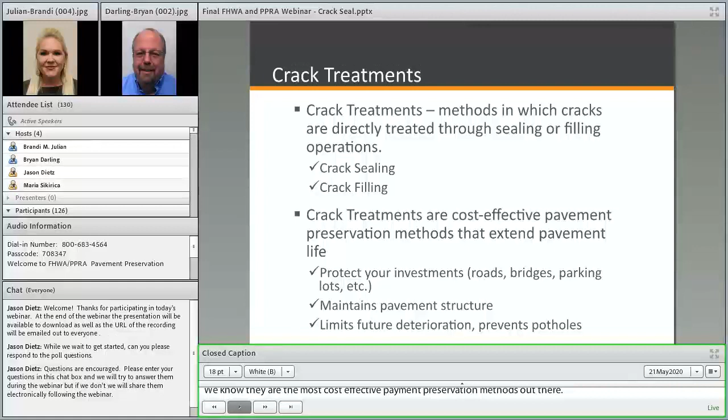First, I want to spend time talking about the differences in crack sealing and crack filling. These terms are often used interchangeably in our industry, and I really want to talk about what the differences are. But ultimately, what is a crack treatment? We know that they are the most cost-effective pavement preservation methods out there. Basically, dollar for dollar, you get the biggest bang for your buck for the money invested as it relates to the sealant service life and the pavement life extension that come out of these treatments. And it's always just about protecting our investments and maintaining our infrastructure.

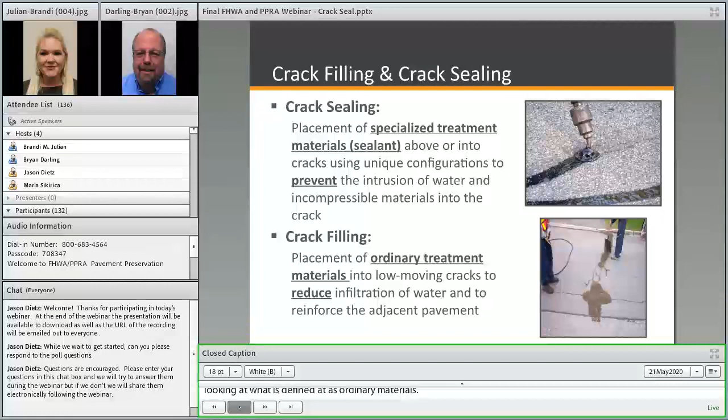So looking at the definition, what's the difference? The FHWA defines crack sealing as specialized treatment materials that are completely preventing the intrusion of water or debris down into the base and subbase of the pavement. So that's ultimately what we're trying to achieve, to really protect the base and subbase. For crack filling, we're looking at what are defined as ordinary materials, so more of your emulsion, sand and oil type materials. And crack filling is really used on areas where we're just looking to fill the void and reduce the amount of infiltration down into the base and the subbase of the pavement. So there is a difference in those two terms, though we know they're used interchangeably within our industry.

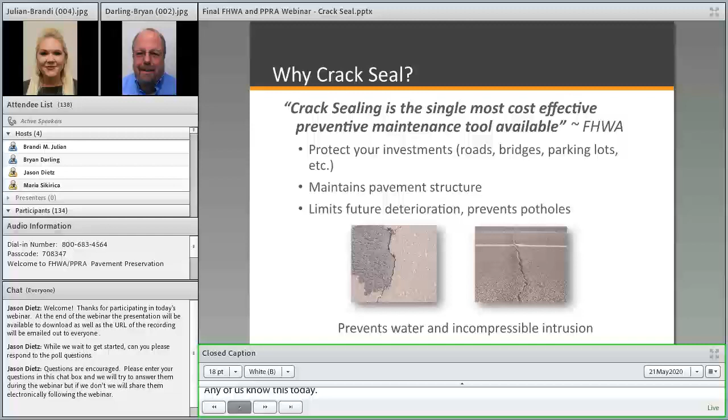Again, right here from the FHWA, a quote: crack sealing is the single most cost-effective preventative maintenance tool available. I think many of us already know this today. Again, protecting our investments, maintaining our infrastructures, and really limiting future deterioration. It's a big pothole prevention method as well. So some of the other side-by-side comparisons: when we look at crack sealing, we're looking at complete prevention, waterproofing, if you will, in comparison to crack filling, where it's more of just filling the void.

Crack sealing, again, specialized materials, and they are highly elastic and flexible. We're going to look at that more in the testing section when we're talking about specifications and how important that is when you're crack sealing and understanding the anticipated seasonal and thermal movement that you might be having in your pavement. Crack fillers are more rigid or semi-rigid materials, so they're not going to be able to accommodate seasonal and thermal changes in your pavement or crack movement. Crack sealing, again, requires a little bit more crack preparation. Routing might be involved. Placement configurations vary greatly with crack sealing. Crack filling is more of cold applied materials or emulsions, dusting with sand.

One of the biggest things I want to call out on this slide is the service life. When we're talking crack sealing, and we'll get into this a little bit more, the average lifespan of just a blow-and-go treatment is about 5 years. On a new pavement, if you're routing and sealing, we've seen up to 10 years of sealant service life in independent studies. So we're seeing great performance out in the field.

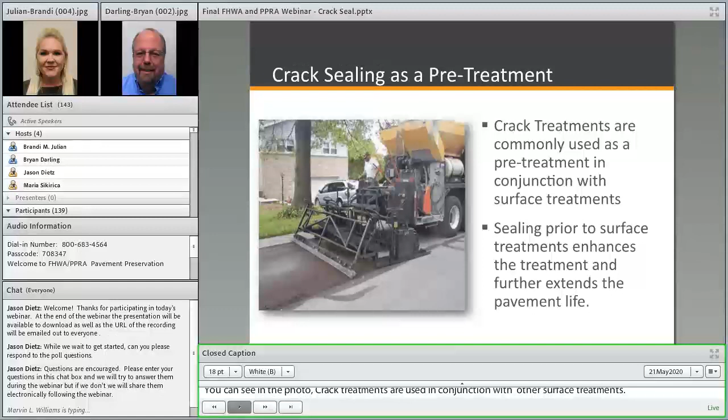So let's go ahead and move in and talk about some of the great data we're seeing come out of NCAT. So again, crack treatments, as you can see in the photo here, are used in conjunction with other surface treatments. We know that if you go in and seal up the cracks prior to your surface treatment, it's going to help extend the service life and the performance of that other surface treatment.

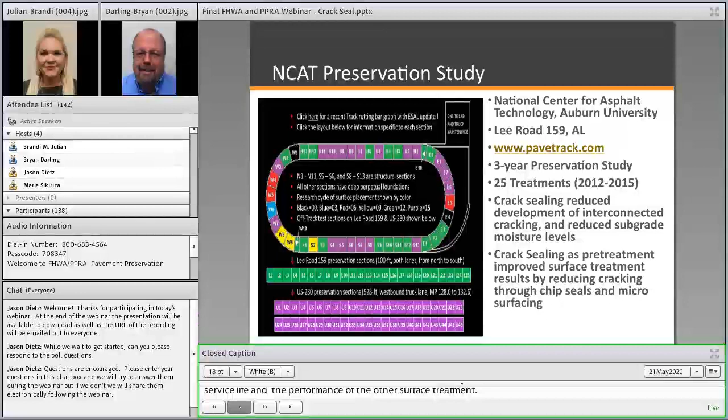So crack sealing is not only effective as a standalone treatment, it really is effective working in conjunction with other pavement preservation methods that you might be doing on a daily basis. So NCAT, that's the National Center for Asphalt Technology. They're based out of Auburn, Alabama. They have a whole bunch of test tracks and roadways down there that they're doing a lot of great independent studies on. They're testing a whole bunch of different pavement mix designs, preservation treatments.

So what we're going to focus on is this green line, if you see here. It's Lee Road 159, and that's what we're going to talk about in this study. But I just wanted to share, this is a print screen directly from their website. It's pavetrack.com. I encourage you to go there and check out their website. All of this data is available on their website. Lots of good research that they provide there to the industry, to the public.

But looking at Lee Road 159, this is a county road that goes up to a stone quarry. So it's a 5.5-inch thick paved asphalt road. What they did was they took 2 sections at the beginning of that surface, and they made 2 control sections. They did nothing to it, applied no treatment. And then moving down along that roadway, they broke it out into 23 different sections, and they applied different pavement preservation applications and materials onto each section.

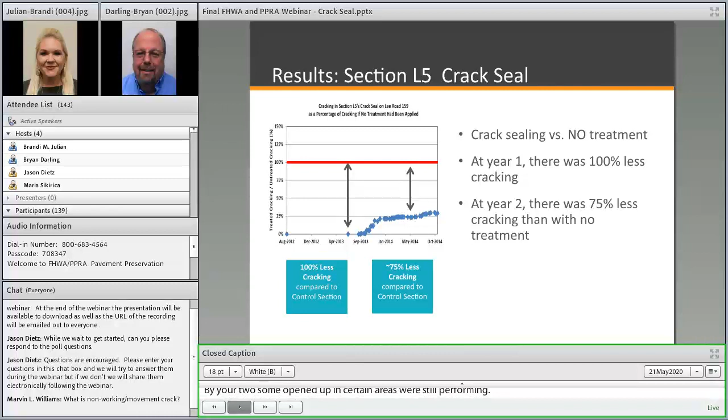So in the next section, L6, they did a single chip seal. So in this treatment section, they did not crack seal first. They just came out, cleaned, and put down a single layer chip seal. Now, it performed awesome through the first year. You can see all the data points here on the bottom line. It was performing at 100% after that first year and that first season.

But in year 2, when we got into that second winter of 2014, you can see that all of the chip seals started cracking open, and in fact had more cracking in comparison to the control section. So basically what this data was telling us is that after about 2 years it loses any value in comparison to having done nothing.

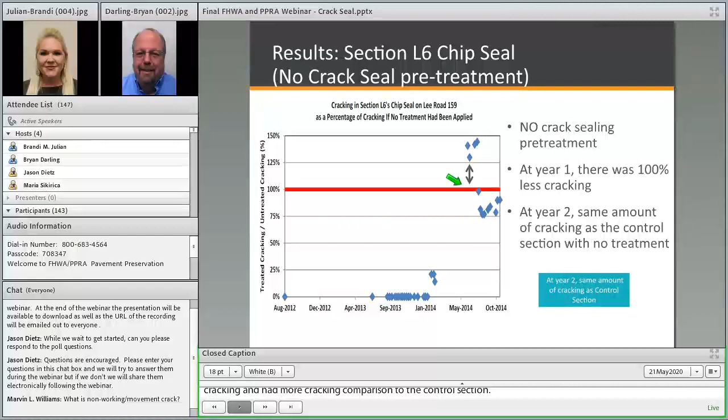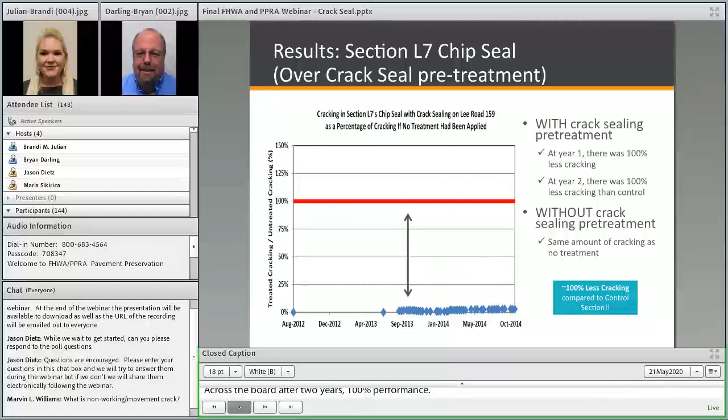So what we looked at next was the next section where they did a crack sealing pre-treatment first of all the cracking, and then put a single layer chip seal down. And you can see here the outstanding performance. So across the board after 2 years, 100% performance. So huge swing there. Without crack sealing, it basically lost all benefit after 2 years. And just by crack sealing first and then putting that chip seal down, it was still performing at 100% after 2 years. So great data there, showing that crack sealing helps the effectiveness of other surface treatments.

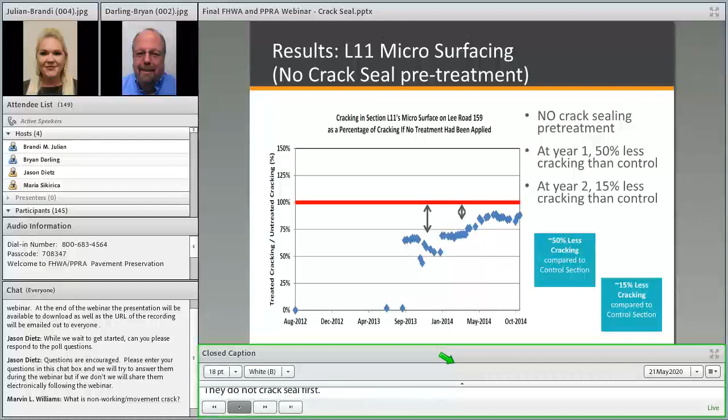This section was a micro surface. They didn't crack seal first, just put down a micro. After 1 year, there was about 50% less cracking in comparison to the control section. After 2 years, only about 15% less cracking. And then in section L12, they crack sealed first as a pre-treatment and then applied the micro. And we saw better performance of the microsurfacing. After year 1, 90% less cracking, and at year 2, 60% less cracking. So again, crack sealing as a pre-treatment really helps extend the performance of all of your other surface treatments.

The impact of crack sealing was published by NCAT. They said as a standalone treatment, crack sealing reduced cracking by 75% in comparison to doing nothing. It reduced cracking 100% with a chip seal in comparison to not crack sealing first. And with micros, it reduced cracking by 45% for microsurfacing treatments. So really good data coming out of there.

All right, now that we've talked about crack sealing as a pre-treatment to surface treatment, let's move into our next section and talk about cracks, their formation and the different types. So Jason, I'll ask you to launch our next polling question here. Rate your familiarity with the different types of cracks and how they are formed. Would you say you're an expert, really familiar, intermediate, pretty familiar, or a beginner just learning?

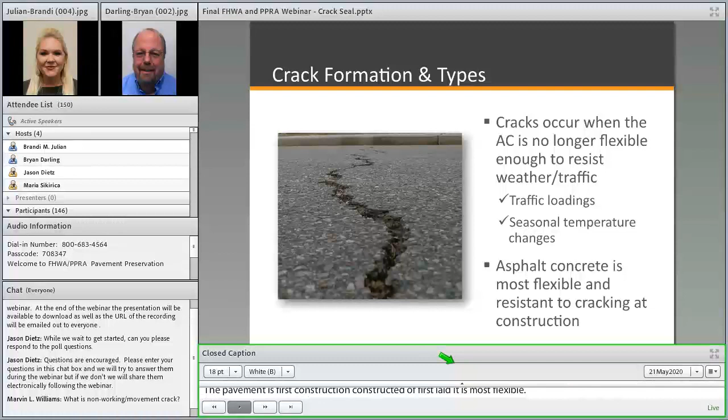So let's move on and take a look at crack formation and its different types. One thing that we know is that all asphalt is going to crack. When that pavement is first constructed and first laid, it is its most flexible. And we know that over time, oxidation from the sun, the seasonal temperature changes, traffic loading, all of those stresses that pavement has to withstand, it's going to eventually crack. So we know that it's inevitable. It's going to happen.

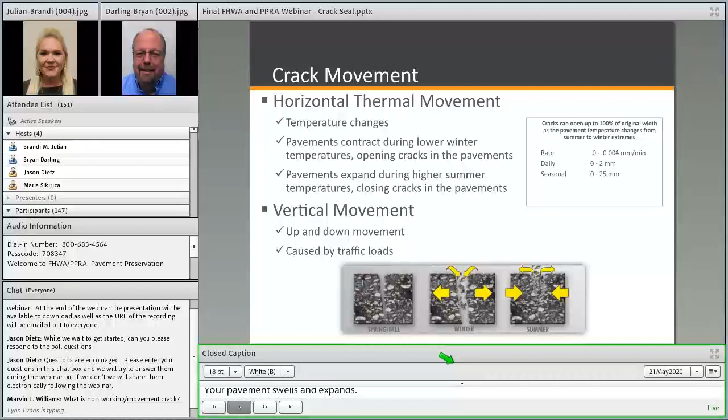And again, it's getting horizontal movement by thermal movement, right? It's cold in the winter in most places. Your pavements shrink and contract, and then it gets hot in the summertime. Temperatures rise, your pavements swell, and they expand. So that constant thermal movement is always part of why cracks form in your pavement. And then your traffic loading is a big part of that vertical movement that pavements have to withstand, but also is part of the cause of crack formation in your asphalt.

So what we do is we define high-moving cracks and low-moving cracks. And the indicator of that is 1/8 of an inch or 3 millimeters. So it doesn't sound like a whole lot, but what we are always trying to understand is: is this crack moving? Is it working? Is it opening and closing a lot throughout the season?

And the reason why we're trying to understand if a crack is moving or not is because that is important in your sealant selection. If you have a crack that is going to be experiencing thermal movement and opening and closing with those seasonal highs and lows, you have to select the sealant that has the flexibility, the high temperature stability, and the low temperature properties to be able to accommodate all of that movement season to season and resist cracking in the winter and resist tracking in the summer. So that's why we're always trying to understand, is this crack moving or not?

And the main takeaway here, again, is that indicator is 1/8 of an inch. If we think a crack's moving more than 1/8 of an inch, we deem that as a high-moving crack. And on the opposite side, if it's moving less than 1/8 of an inch, we deem that a low-moving crack. So a question I get a lot is, how do I know? Am I going out there with a ruler and measuring it all year? No, we know that's not realistic. People aren't doing that. But a great way to understand that is by the type of crack. You can kind of take an educated guess by looking at the type of crack.

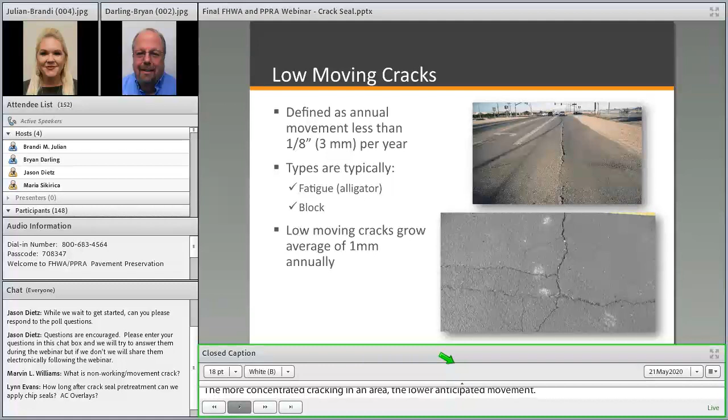Cracks that are going to be low-moving are typically going to be fatigued areas. The more concentrated cracking in an area, the lower anticipated movement. The further spacing between cracks, the more anticipated movement. So low-moving cracks are going to be block type cracks or fatigued and alligator areas.

Cracks also grow. This is something else we know. I get asked a lot, when should I start crack sealing? How wide does a crack have to be before I should start a crack sealing program? And the answer there is as soon as you have a crack, you have a problem. You're letting water down into the base and the subbase of your pavement. So kind of standard is about 1/8 of an inch. If you have cracks that are open, those are pretty small, hairline to 1/8 of an inch, you should begin crack sealing.

Because what we know is going to happen is they're going to continue to deteriorate. That traffic loading, those wheels, that abrasion driving over the face of that crack is going to wear it away and open those cracks up, along with any seasonal temperature changes, that thermal movement. It's going to continue to degrade and ravel away and open that crack up. So we do encourage you to crack seal earlier than later. It's, again, about preserving our pavements, keeping our good pavements in good condition.

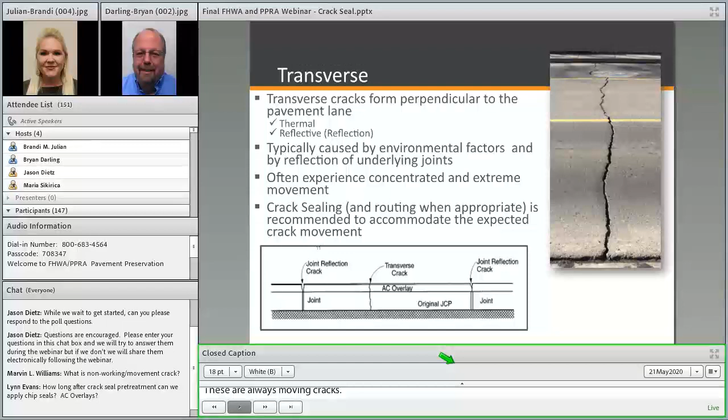Longitudinal cracking, so these are the cracks that run parallel with your driving lanes. They often are formed in one of two ways. One is a construction joint when they're laying that HMA mat, right? They lay that one section of paving lane. It cools down, and when they come back to lay down that second paving lane right up against it, adjacent to it, you get a cold joint there, and that's always the weakest spot in that pavement. And that's why you see those longitudinal cracks that run for miles and miles along the roadway.

So we talked about cold joints. The other way that longitudinal cracking forms is often just by traffic volume, traffic loading. They often occur in the wheel path in the road. And with the longitudinal cracks you find in a wheel path, we definitely also highly recommend crack sealing those as well, because this is the area that often gets rutted right there in the wheel path. Water flows down into it, and this becomes susceptible to becoming that rutted alligator area we so often see in our asphalt roadways.

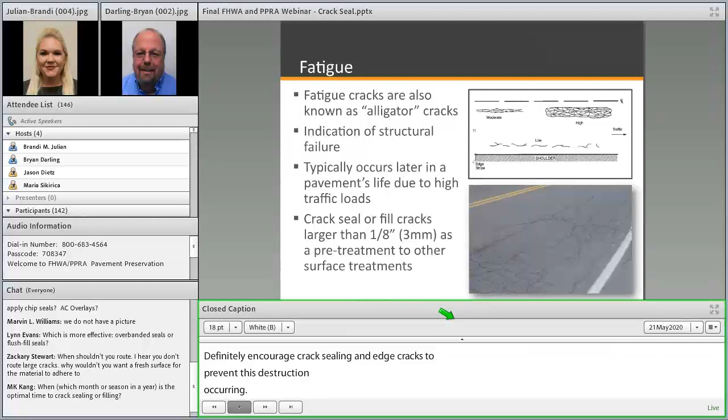Fatigue cracks, so we talked about this a little bit earlier. This is in older pavements where they have not really been preserved and have been let go, and they get to a point where you have a lot of interlocked cracking like this. When asked if I would crack seal something like this, this is not something in this photo that would really be a candidate for crack sealing. Again, unless you would be coming in crack sealing knowing that you're doing it as a pre-treatment to a different surface treatment.

I talked about crack density and the amount of crack spacing in an area, and we tend to use that as a rule of thumb. So when you're trying to calculate crack density, what you're really looking at is over a very specific area of pavement. You're looking at the linear footage of cracks that are present per square foot within a specific pavement area. And what we always mention with routing specifically, if you're going to come in and route a reservoir and you're doing a route and seal application, we use a rule of thumb of 20%.

If you have crack density greater than 20%, we are not going to recommend routing. We're going to say there's probably a little bit too extensive cracking to run a router through that asphalt. You might do more damage than good. So in this case, we would just recommend a blow and go: going in, sealing, putting an overband down. In pavements where you have less than 20% crack density, we would, again, as a rule of thumb, highly recommend that as a candidate for a route and seal type application. And again, other variables always come into play, but that crack density, that 20%, is just a good general guideline or rule of thumb.

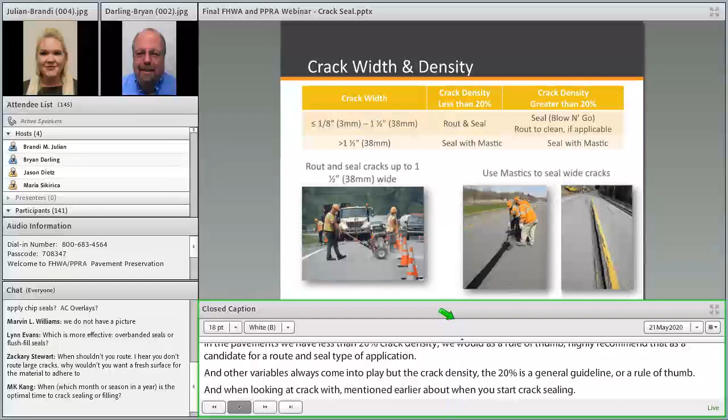And when looking at crack width, I mentioned earlier, when do you start crack sealing? Well, as soon as you have cracks open up, time to start thinking about it. So anything hairline to about 1/8 of an inch up to 1.5 inches wide is a candidate for crack sealing. If the crack density is less than 20%, now we're going to say route and seal that. So again, cracks 1/8 of an inch to 1.5 inches with less than 20% crack density, we're going to say route and seal.

If it's a 1/8 of an inch to 1.5 inches wide crack, but has greater than 20% crack density in that pavement, we're not going to recommend routing. We're saying that's appropriate to just do a blow and go application. Anything over 1.5 inches wide is too large of a distress for crack sealant alone to accommodate.

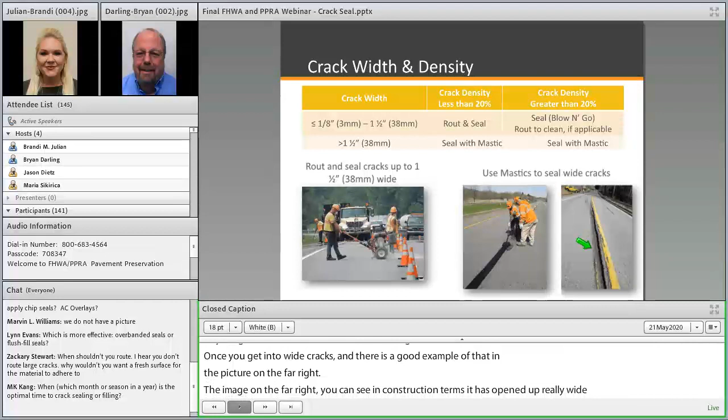So once you get into wide cracks, and there's a good example of that in the picture on the far right here. I can't get my arrow to work, I apologize. But in the image on the far right, you can see an old construction joint that is opened up really wide, and it's a great candidate for mastic. So anything over 1.5 inches wide, that's when we definitely recommend moving from a crack sealant to a sealing mastic. And mastics have aggregates in the binder, so there's additional structure and support in that material to be able to seal up wider distresses, as you can see in that middle image there.

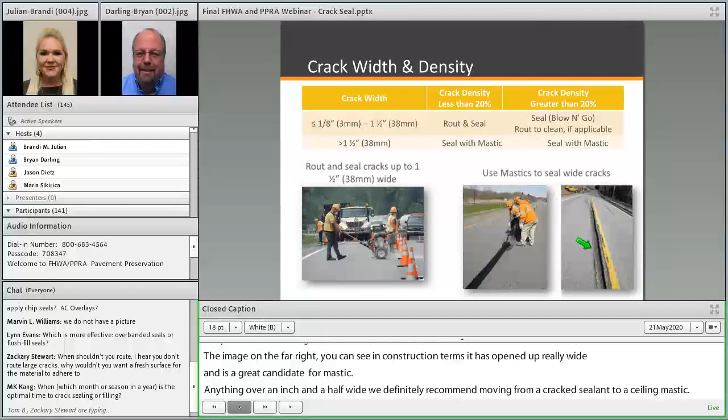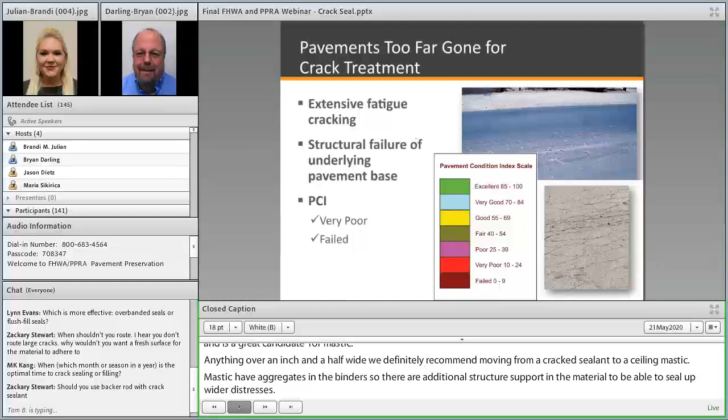All right, and pavements that have gone too far. So crack sealing obviously is not appropriate everywhere. Anywhere you have extensive fatigue cracking, if you have structural failure, if you have base failure or underlying pavement base issues, other types of more extensive rehabilitation or reconstruction are going to be necessary. Crack sealing would not be appropriate in those conditions.

All right, so we're now moving into our fourth section where we're going to talk about installation best practices. Jason, if you can go ahead and launch our next polling question. So for all of our attendees here, how familiar are you with crack sealing operations, actually going out and doing the work? Are you somebody that's really familiar with crack sealing, intermediate, pretty familiar, or are you a beginner or not very familiar with the actual application process? We'll give a couple more seconds here. Lots of answers are still flowing through.

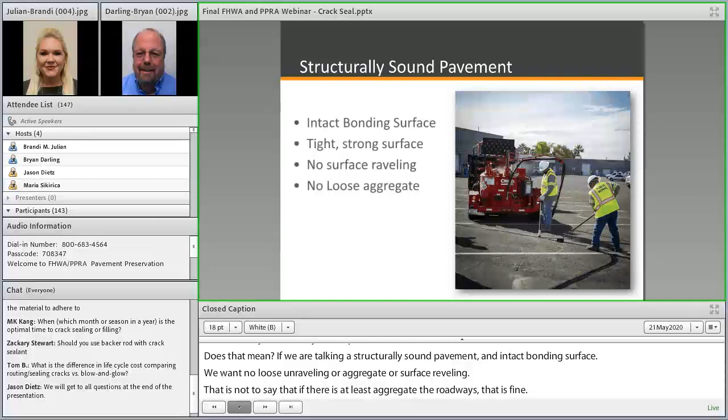So what does that mean? If we're talking a structurally sound pavement, an intact bonding surface, we want no loose raveling or loose aggregate or surface raveling. That's not to say that if there's just loose aggregate on the roadway, that's fine. That can be blown off with an air compressor. But all of the types of cracks that were shown in the previous section are great candidates for crack sealing. So again, good bonding surface, no raveling, and no loose aggregate inside of that crack face.

Dry, it has to be dry. If there is moisture present inside or down inside of a crack, it is going to negatively impact the adhesion and the bond of the sealant to the asphalt surface. So it's imperative that it be dried out. If it rains or it's been damp, close to the dew point, wait a few days.

Even if it had been a few days since the last rain event, but it might be close to the dew point or still damp outside, we're going to highly recommend that you use a hot air lance to really get down inside of that crack. Even though you might not be able to see moisture with your naked eye, it can and probably likely is still present down in that crack. So it's just a good rule of thumb to use a hot air lance there. Get out any moisture or dampness that might be down in that crack to help improve the adhesion of your sealant. Because ultimately, we want it to stick, right, and do its job and seal that crack.

Weather considerations. Ideally, we are looking for moderate to warm temperatures. Now, that's why spring and fall tend to be ideal crack sealing seasons across the United States. In most locations, the spring and fall are those times of year when our temperatures aren't our hottest and aren't the coldest. Little to no wind is also ideal. If you have increased wind, then you need to worry about keeping the material temperatures accurate, and your temperature of the pavement is important. We're looking for 40 degrees Fahrenheit minimum. So 40 degrees Fahrenheit is that pavement temperature minimum that we are looking for.

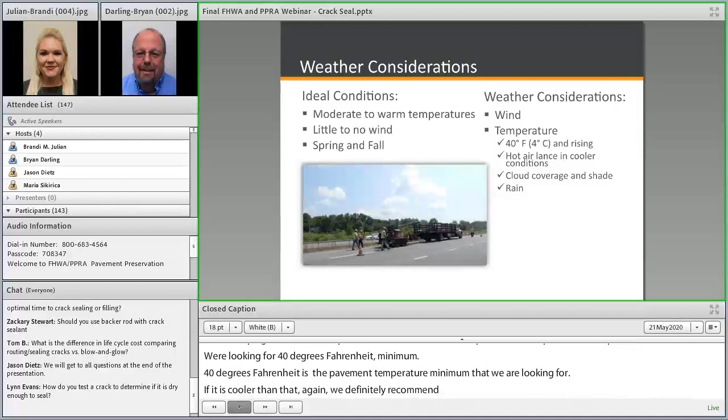If it is cooler than that, again, we definitely recommend use of a hot air lance to bring up that pavement temperature, remove any possible moisture that might be in that pavement, and it will help loosen up the old oils and binder in the asphalt and help with that adhesion and bond when you're crack sealing.

So crack sealing is one of the few applications that can be done year-round if conditions are appropriate. We just mentioned that spring and fall are ideal. We see that all the time. We see summer crack sealing programs around the United States. Very typical. I am out here in Phoenix, Arizona, so we do not see that out here in the summertime when it's 120 degrees outside. But a lot of places in the United States, we know they're crack sealing out in the summer.

And in places, we have seen successful winter crack sealing programs. Again, conditions have to be appropriate for a winter crack sealing program, but it can be a good alternative when there's no other construction projects that can be completed at that time of year. If conditions are that it's dry, there's no actual snow accumulation on the ground, you can crack seal in the winter, and we have seen some northern states achieve really successful winter crack sealing programs.

Again, we're not going to go into all the details today, but if it's dry, the air temperature can be virtually anything. What we're always focused on is that pavement temperature. We know it's cold, so you're definitely going to have to use a hot air lance in a winter crack sealing operation, increase that pavement temperature and help with that adhesion.

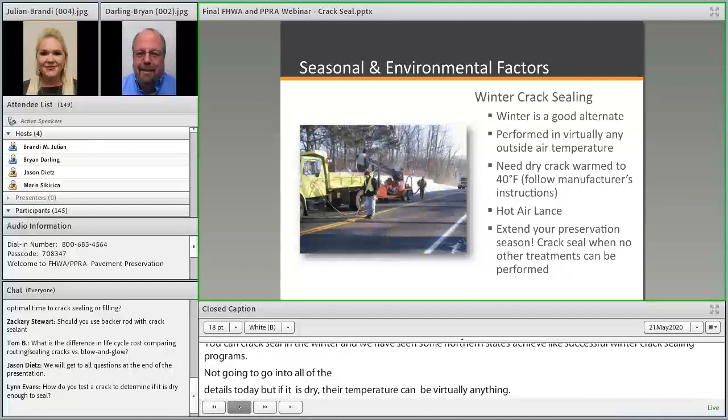And after that sealant cures, you'll be able to walk over, bend down, and pull that right out of that asphalt. It's not going to do what we're intending it to do. So it's imperative that cracks be cleaned out. Use of an air compressor is the most common crack cleaning operation. Just get down in there with a compressor, blow it out.

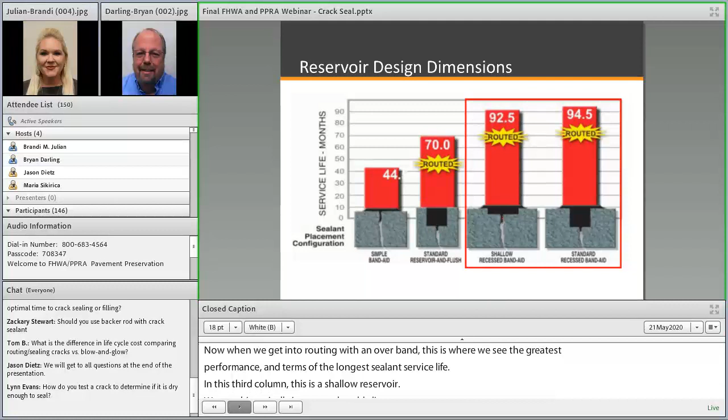Now when we get into routing with an overband, this is where we see the greatest performance in terms of the longest sealant service life. So in this third column, this is a shallow reservoir. We see this typically in extremely cold climates. So think Montana type climate, very, very cold, minus 40 C. What we're doing here is a very shallow, wide route, filling and putting an overband on that. And we're seeing 92.5 months of sealant service life in this type of an application.

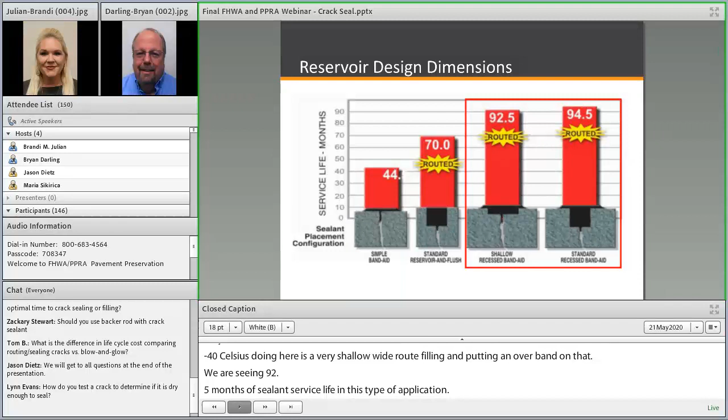And then what is standard in most areas for a route and seal is this last chart here on the far right. Standard route with an overband application, and we see approximately 94.5 months. So that's almost 8 years. So we're seeing great results. So there is definitely a correlation between the type of installation and the performance you're going to get out of it.

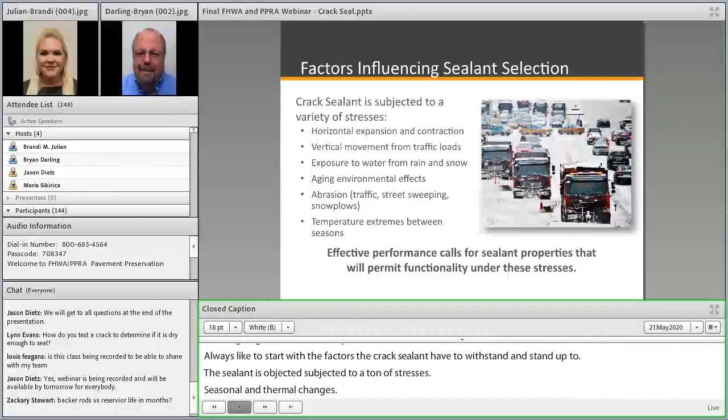So we're going to talk about the specifications for sealant. So I always like to start with the factors that crack sealant has to withstand and stand up to. Sealant is subjected to a ton of stresses: seasonal thermal changes, traffic loading, water, rain, oxidation from the sun, abrasion from plows, temperature extremes, right? It's going to be getting beat up all the time. So we need to make sure that our sealant materials are appropriate for the roads they're going to be put on, because they need to be able to withstand the stresses they're going to be exposed to.

So one of the very first ones that you always need to take into consideration is climate. It can get extremely hot in certain areas. That's very true here. I'm in Phoenix, Arizona. Pavement temperatures are extremely hot in the summertime. You need a sealant that is going to be able to still maintain its stability and not track and run and become liquefied at extremely high pavement temperatures.

In other areas of the country, it's extremely cold, and you need a sealant that's going to be able to maintain a softness and a flexibility in the wintertime and be moving without cracking open. So climate and temperature is very important when selecting a sealant. And the crack sealing spec is ASTM D6690. And I'm not going to go into great detail on all four of the types, but there's type 1, 2, 3, and 4.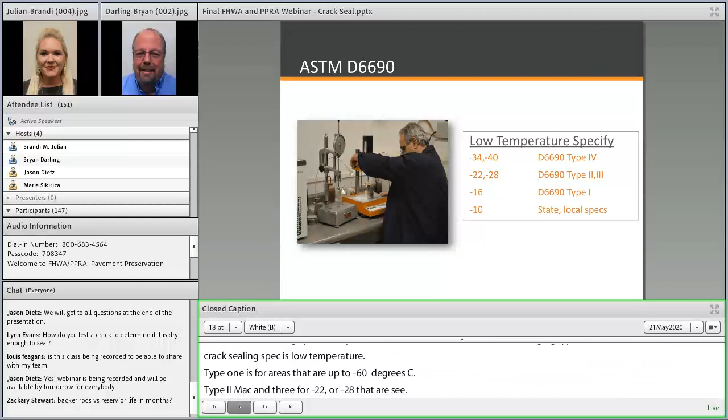And they all have different testing cycles and temperatures, but the main difference distinguishing type 1, 2, 3, and 4 of our crack sealing specs is low temperature. Type 1 is for areas up to negative 16 degrees C. Types 2 and 3 for negative 22 or minus 28 C. And type 4 is what we call a low modulus product. These are for extremely cold climates. So you're looking at minus 34, minus 40 C areas. So that's the main differential between the four types of the crack sealing spec, that low temperature.

And the first test that's really important is the bond test. Adhesion is important. Crack sealant has to remain adhered and bonded to the pavement in order to do its job. So what we do is a bond test. You can see from this image what we do is cast some crack sealing material between two concrete blocks, and we run it through a variety of extensions. Sometimes we have to put it in the freezer for quite a few hours. A lot of times the samples are between like negative 20F and 20F.

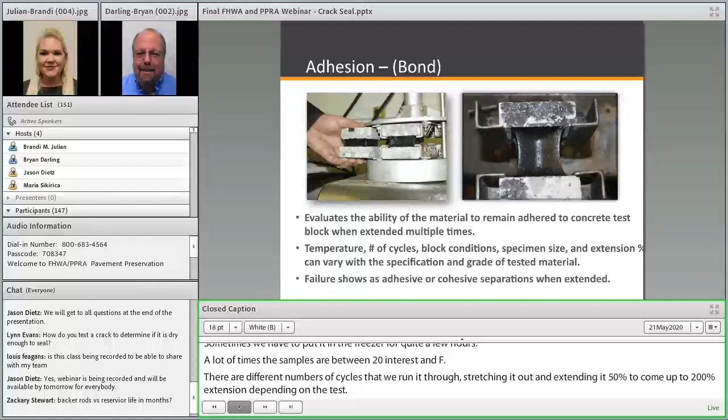There's different numbers of cycles that we run it through, stretching it out, extending it, 50% up to 200% extension, depending on the test. But the main takeaway is we run it through a lot of tests to make sure it can remain bonded to the pavement surface. So that's a very important test. Because in the field, if you don't have good bond, you get adhesive failure, as you can see here in this image. And the sealant will pull right out of the crack.

Another test we perform is the cone penetration test. And what this is testing is the material hardness or its stiffness.

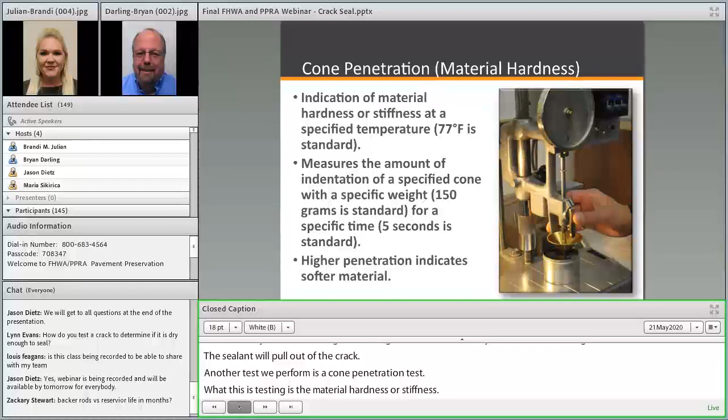As you can see in that image, there's a specimen in a cup, there's a little cone, and it's usually done at like ambient temperature, 77F or 0C, 32F. There's a whole bunch of different temperature ranges we'll do this in. And what they do is they use a specific weight, like 150 grams is pretty standard, and they kind of push that down in there for about 5 seconds, and they just measure how far that cone penetrates into the material.

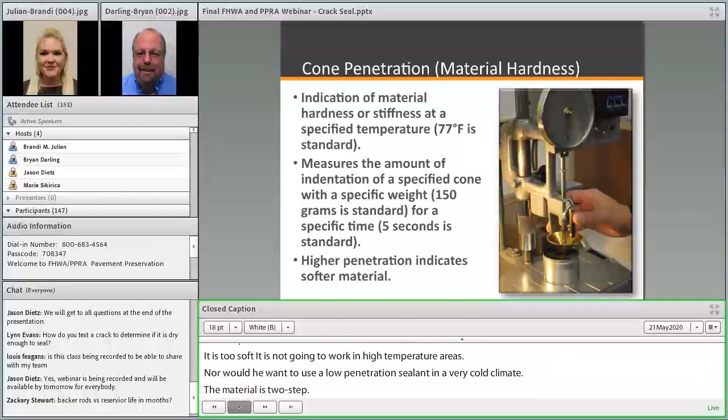So again, relating back to climate, you wouldn't want to use a sealant with high penetration in an area with extremely hot temperatures. It's way too soft. It's not going to work in high temperature areas. Nor would you want to use a low penetration sealant in a very cold climate. That material is too stiff. It can crack and become brittle in the winter. But this test is not the sole determining factor of which climate a sealant should be used in, but it is one of the important measurements for that.

Softening point. Now this is looking at high temperature stability. This measures when does a sealant material stop being a solid and turn into a viscous liquid. So at what point does it melt, basically? When does it go from a solid to a liquid? And what we are measuring this for is to make sure that the material is able to maintain high temperature stability on the pavement while traffic is running over it in the extremely high summer temperatures.

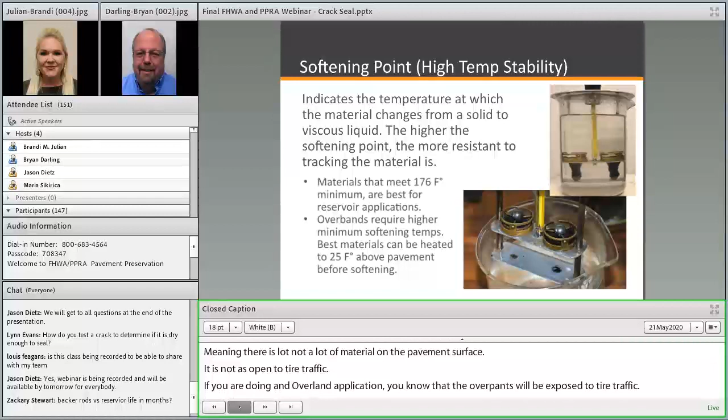Usually a material that is about 176 F is best for a reservoir application, meaning that there's not a lot of material on the pavement surface. It's not as open to tire traffic. If you are doing an overband application, you know that that overband is going to be exposed to tire traffic. What we always recommend is that the softening point be 25 degrees higher than the pavement's highest temperature in the summer. That way you can ensure that that sealant will maintain high temperature stability in the summer months.

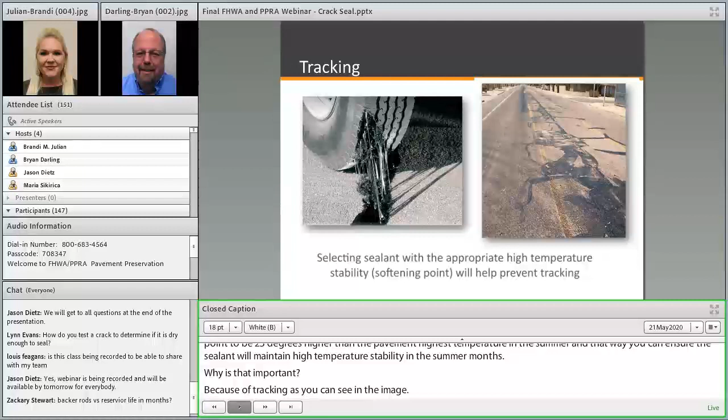Why is that important? Because of tracking. As you can see in these images, tire pickup is the image here on the left. And on the right, this is an image from here in town in Phoenix. This is an entryway, I believe, into a school. So you can see what happens when the incorrect material is selected. Tire traffic picks it up and tracks it along the road and causes some messy issues. So that's why that softening point and high temperature stability is so important.

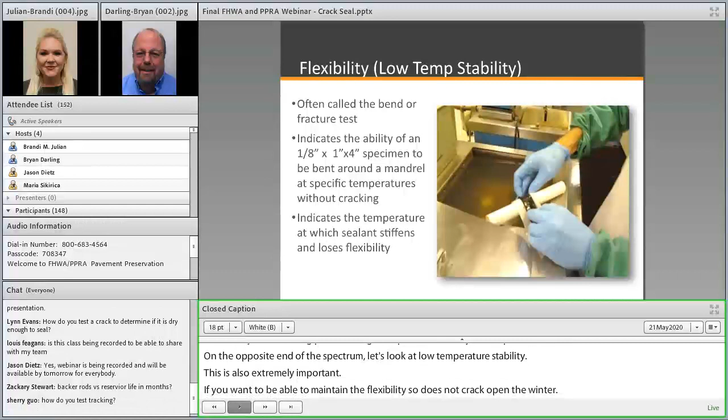Now on the opposite end of the spectrum, let's look at low temperature stability. This is also extremely important: a sealant being able to maintain its flexibility so it doesn't crack open in the winter. So we do a flex test called a bend or a fracture test. We take a sample of material and we bend it around a mandrel at a specific temperature, and we see if it cracks or not. That's the basic formulation for how this test is approached. So we're checking for flexibility ultimately to prevent this cracking, as you're seeing. We want that material to be able to perform season after season after season for you without cracking open.

Another thing we're going to talk about is elasticity. The way this was explained to me once made complete sense, so I completely plagiarized it, and it's how I explain it now. When we're talking resilience or elasticity, it's the difference between a rubber band and chewing gum or silly putty, right? We know with a rubber band, if you stretch it and let it go, it snaps back to its original shape. It's highly elastic, highly resilient. Silly putty or chewing gum, we know that if you pull it, it just kind of oozes out and stays there. It doesn't try to pull back to its original shape. So that's a low resilience material.

So why are we measuring resilience in materials? It's important because high resilience sealants are able to prevent rocks and debris penetrating down into the sealant, because they're always pushing back up and they help keep debris out. But at the same time, as you increase elasticity or resilience, you lower the adhesive properties of that sealant. If you think about sealant being inside of a crack, if it's trying to pull back into itself all the time, it's always trying to pull away from the surface of the crack. But elasticity, depending on the type of pavement you have, is an important factor.

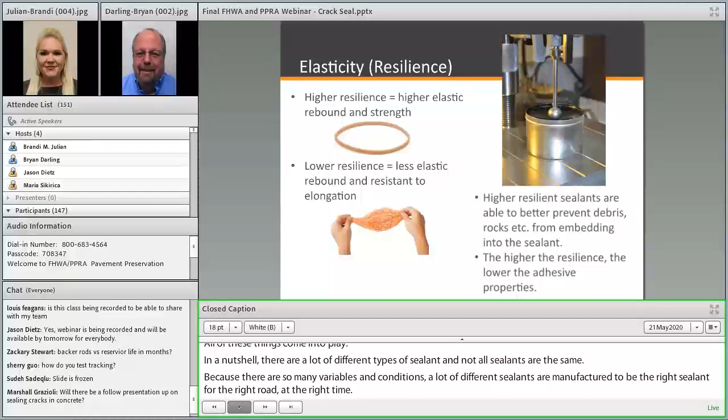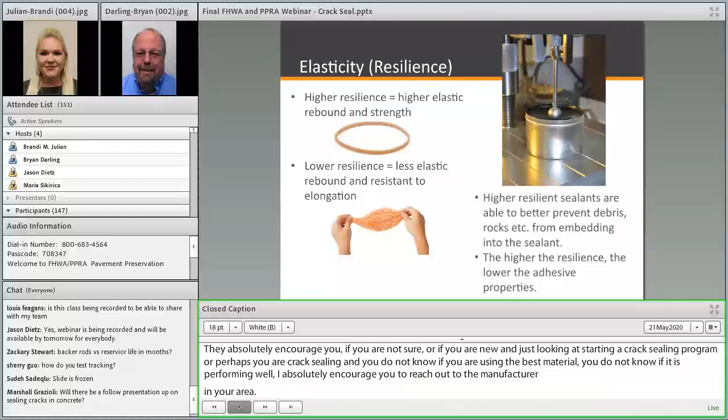And in a nutshell, there are lots of types of sealants, and not all sealants are the same. Because there are so many variables and conditions, a lot of different sealants are manufactured to be the right sealant for the right road at the right time. So if you're not sure, or if you're new and just looking at starting a crack sealing program, or perhaps you are crack sealing and you don't know if you're using the best material or if it's performing well, I absolutely encourage you, reach out to the manufacturer in your area, talk to your rep, have a discussion, go through the data sheets, look at the tests, understand that sealant and the different sealants and what is going to be the best product for you and give you the highest level of performance to last years and years for you.